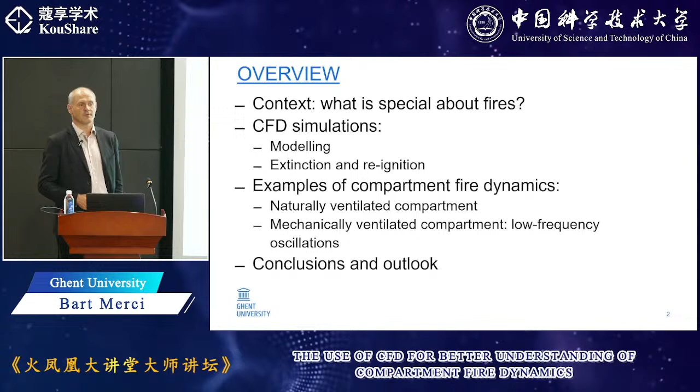I'll then briefly go through equations. I will not spend too much time on that, because that would take hours to fully explain. But I prefer to move on to two examples where we will demonstrate how CFD can probably be useful to understand what's going on in the compartment. The first one will be in a naturally ventilated compartment, and the other one will be a mechanically ventilated compartment. And I'll try to draw some conclusions and give a little bit of an outlook as to where we might be going in the future. But first things first, what is special about fire?

I'm not sure that everybody here is fully familiar with CFD, so I would first like to make clear that CFD is about calculating flows, temperatures, and concentrations inside volumes when we talk about the built environment, but could also be in open atmosphere when we talk about wildfires, as is one of the important research topics here as well. So both compartment fires and wildfires.

Now, as you refine this mesh, you see that the number of cells goes up quite quickly, because you have a three-dimensional space. That means whenever you divide a cell by a factor of 2, it's a multiplication of a factor of 8 in the number of cells, plus also the time steps that you can take have to be shorter, because then you are solving on a smaller mesh. So in general, rule of thumb, if you divide by a factor of 2, your computational time goes up by a factor of about 16, which is quite important, because if a calculation takes 1 hour and you divide by a factor of 2, it becomes 16 hours, and another factor of 2, it becomes 10 days.

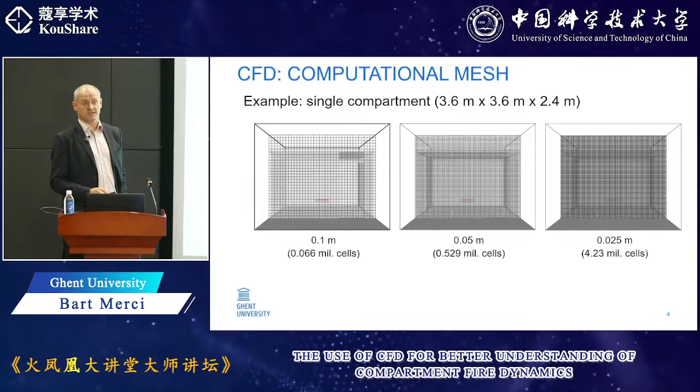Now all these phenomena, if you think back to this representation, happen inside these boxes, and these boxes are a few centimeters large. We're talking here about much, much smaller length scales, very fast processes, so you cannot resolve that. You will have to model it because you cannot see it - it happens inside these boxes and you don't have information about what's happening inside. Now this is the chemistry and the chemical reactions.

Now fires are also turbulent. Why? Because fires are relatively large, and the moment fires grow large they develop turbulence by themselves. That would require an additional lecture to explain, but please trust me on this - fires are turbulent. You can also see that: if you have a campfire, for example, you see the flames dancing around. That is turbulence that you see, and these are turbulent fluctuations in the flames.

Now the ones that you see are, again, on the order of a few centimeters, because we see them with the naked eye, and the frequency is a few times per second, so these would be on the scale of perhaps around a tenth of a second. But these are the large turbulent scales - those are the ones that we see. Turbulence also has a wide range of length scales and time scales itself.

The smallest length scales and smallest time scales in turbulence will not be resolved on the computational mesh. That's why we will be happy to only resolve the large turbulent structures. A turbulent structure in the literature is called an eddy, and so we will have large eddy simulations.

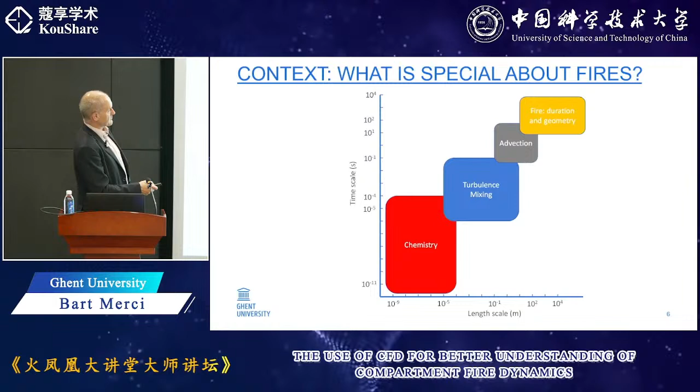And then there is also advection, some people call it convection. That is, for example, the smoke motion. If you have a flame, the smoke will start to move due to buoyancy, due to forces in the flow. Again, relatively large scales, but these are normally quite well resolved. With the computational mesh, we would be in this order of magnitude, so pretty much all of this would be resolved. We don't need special models to deal with that.

So that's the overall setting. The thing is, in fires, and that's another difference from say a combustion device, everything is very strongly coupled to each other.

If you think about a combustion device, take an engine, you would have a team of engineers optimizing a certain design, often to ensure good mixing of fuel and oxygen and very efficient burning. In such circumstances, the flame is the result of the flow field, and the flame is relatively passive. It is where it is because of the designed flow field.

A fire has not been designed to happen, everything happens naturally, and now the flames are actually an important driving force for the flow. That has an important consequence, because I've just explained that we will have to model the turbulent combustion, but the turbulent combustion has a big impact on the flow field. So if you make an error in that modeling, you will make an error in the flow field and you will keep piling up errors. So there is a lot of importance in having a good model for the turbulent combustion.

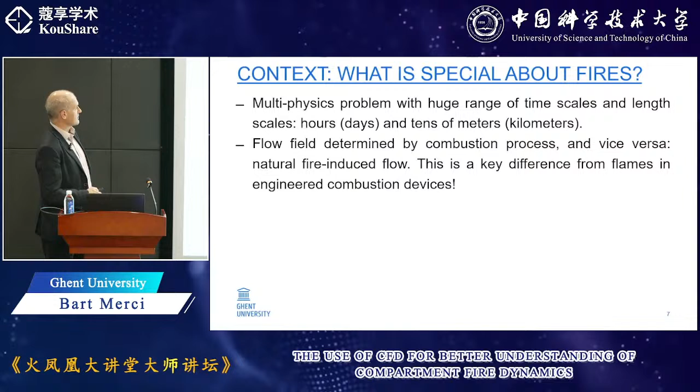So that is different from a combustion device. We will always have an important impact also of the geometry where the fire is taking place. Take the compartment where we are now and the situation as it is. We have a number of doors. That one is now open, right?

If there was a fire over here, the fire would create buoyancy, the flow would start, and essentially the smoke, if we don't do anything, would flow out through that door and fresh air would come in through that door. It will create a certain flow field here inside. But just as well, that door could have been closed and the door in the back could have been open, which would have created a different flow field. If the ceiling had been 2 meters higher, again we would have a different flow field and evolution. So the geometry is always important.

And that comes along with ventilation conditions, because fire needs oxygen. If you have limited ventilation, the fire might die due to lack of oxygen. If you have more openings, the fire might grow in a different way. And then wind will always play an important role. There is a lot of research going on about crosswinds in pool fires out in the open, which is very valuable, but also inside the compartment you will have these kinds of cross flows, which could become very complex, and I'll show an example later on.

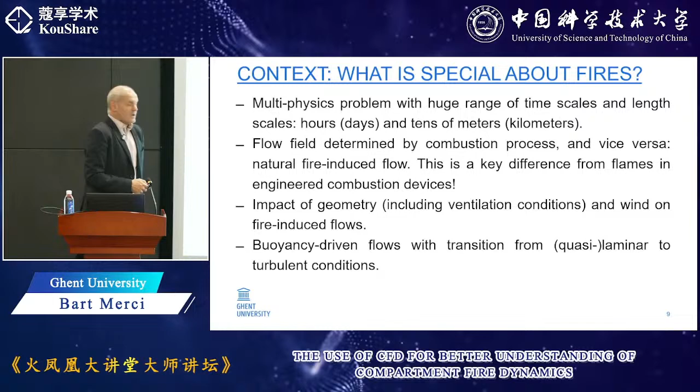Another issue with fires that is quite different from classical turbulent combustion is that fires are large enough to be turbulent, but close to the burning surface, the flow will not yet be fully turbulent. It will be laminar, quasi-laminar, not yet fully developed. That's a problem, because most turbulence models assume you have fully developed turbulence.

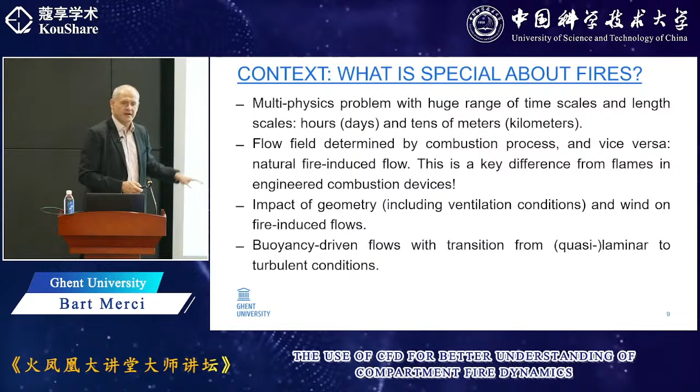You could say, well, if it's okay for the large part of the flame, what's the problem? The problem is that close to the surface, you want a good idea of the heat transfer, because that's where pyrolysis is taking place, or evaporation in case of a liquid fuel. So you need a good description of phenomena happening close to the surface. That is what inspired us in Ghent to work with a dynamic approach, which I will explain in a minute.

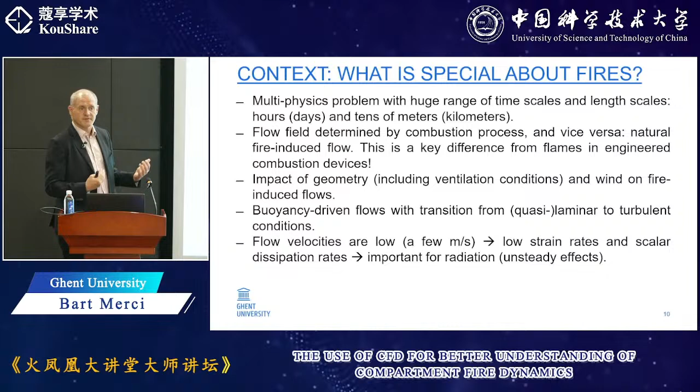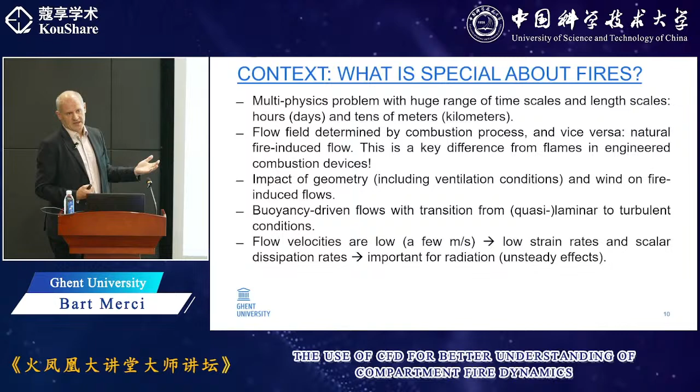Something else quite specific is that the velocities are relatively low. We talk about a few meters per second, in extreme cases perhaps 10 meters per second. I'm not talking about wind, I'm talking about flames and flame-induced flows. If you have low velocities, you also have lower velocity differences, velocity gradients in physical space. Most of the models used in the turbulent combustion community have been developed for so-called jet flames, where you have much higher velocities, gradients, dissipation rates, and strain rates. So again, many of the models cannot just be taken off the shelf and used in fires.

You have buoyancy and an upward rising of the smoke. If the smoke rises, you can think of this as a piston—not exactly the same, but you can think of it that way. If you have an upward moving piston, you create an underpressure, so you have natural entrainment of air. This is a natural process. You have combustion in the flames generating heat. Most of the heat flows away with the smoke, but some is transferred back to the vaporizing or pyrolyzing surface by convection and radiation, and you have a closed loop.

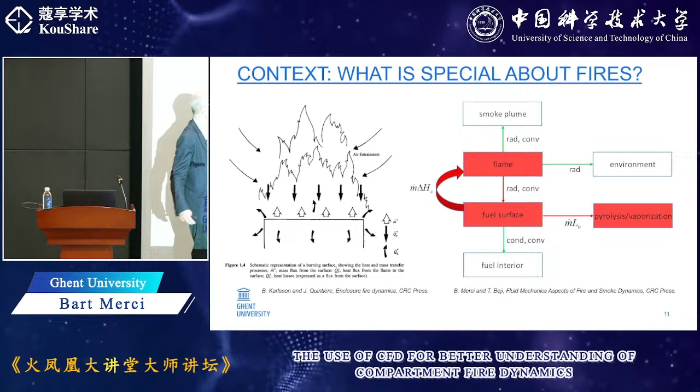The point I want to make is that all of these things are connected to each other. So if you make an error somewhere in this picture, you will affect everything happening. Imagine you are under-predicting the heat transfer to the surface for whatever reason—maybe convection, radiation, the flow field, or the location of the flame. If you under-predict this, you will under-predict the release of combustible gases, you will make the flame weaker, and keep under-predicting the flame—an error that piles up. Or vice versa, if you over-predict the heat transfer, you will release more combustible gases, make the flame stronger, and keep increasing the heat release rate. So this is quite important.

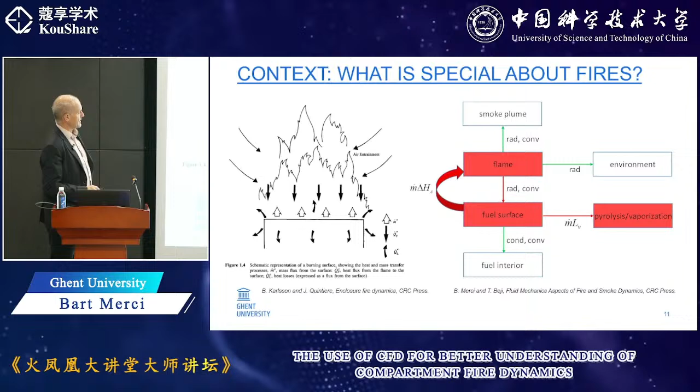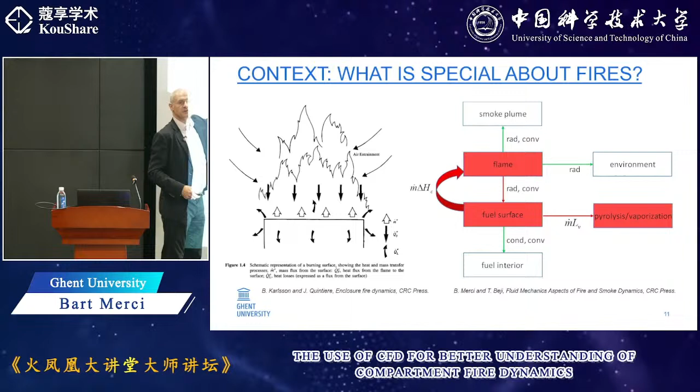A final point I want to make is that in fire flames, the temperatures are relatively low compared to flames in combustion devices. Once again, fires have not been designed to happen, so it's not optimized mixing. There is much soot production and much radiation from those flames, so they lose a lot of heat to the surroundings.

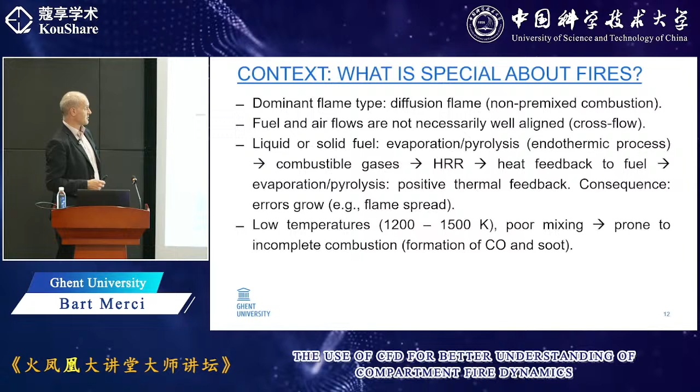The temperatures are relatively low compared to combustion devices, which means many chemistry schemes validated for turbulent combustion in engineered devices are not directly applicable. This is particularly true for the formation of carbon monoxide, which is an important killer in fires, and also for soot. Many soot mechanisms are not directly applicable either. So many problems that we have to address.

It becomes more complex if you have a fire inside a compartment, because most of the heat is going away with the smoke. But if you have a compartment with a ceiling, that smoke does not escape - it's blocked by the ceiling. It will form a smoke layer that also participates in this entire complex heat transfer mechanism, so the scheme becomes even more complex than before.

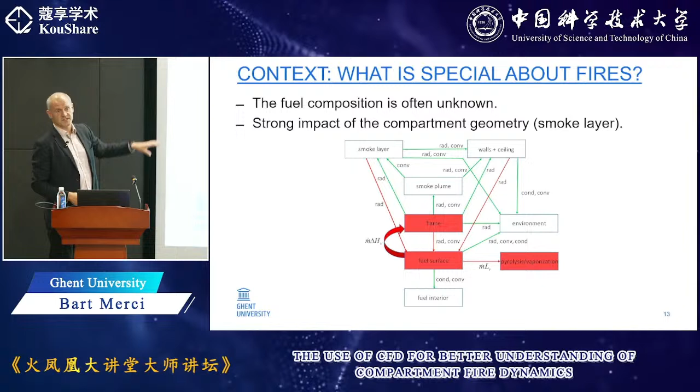I'm not going to go into more detail here. That's about the context, and I know I took some time, but I think it's important to have that first in mind, so that you can now appreciate what we try to do in terms of modeling.

We cannot resolve everything, so we have to introduce modeling, as was already mentioned at the introduction. If you're interested in what people are doing today in terms of CFD, I'd invite you to look at the MaCFP workshop series, a working group under the umbrella of IAFSS, of which Professor Liu is the current chair. There you can see what the different teams are doing - it's a GitHub database with a lot of details.

To summarize, what everybody in the fire community is doing is LES, large eddy simulations, where you resolve the largest turbulent structures. What we do in Ghent is something quite unique at the moment, and we'll see if people follow that - we use a dynamic approach for the turbulent combustion modeling.

What does dynamic mean? It means we do not fix model constants. We make those model constants into parameters and give them values that depend on the local flow conditions. The reason is that the flow is not fully developed, so the turbulence is not fully developed, which means model constants developed under the assumption of fully developed turbulence might not be valid - we want to give them a dynamic value.

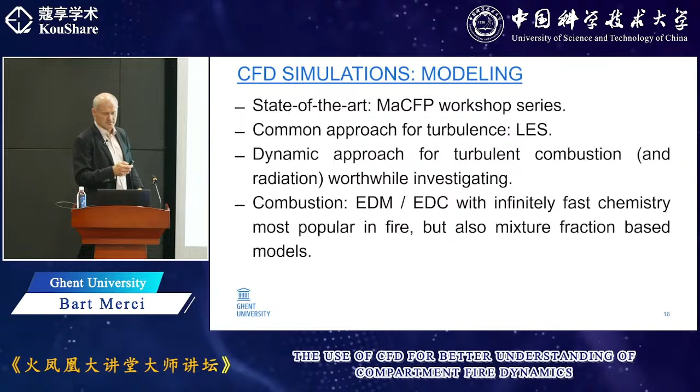This uses infinitely fast chemistry, which is the most popular approach in fires. Infinitely fast chemistry means you assume the chemistry is much, much faster than whatever happens in the flow, which makes sense if you look at the initial diagram - the timescales are indeed shorter. But it also has disadvantages, because assuming infinitely fast chemistry means it will react immediately, even if conditions are perhaps not good enough for reaction in reality. So we also talk a bit about finite rate chemistry.

I'm not going to talk about pyrolysis, I'm not going to talk about evaporation. Those are very important things to consider, but I don't have time to do that. I'm going to go a bit faster here.

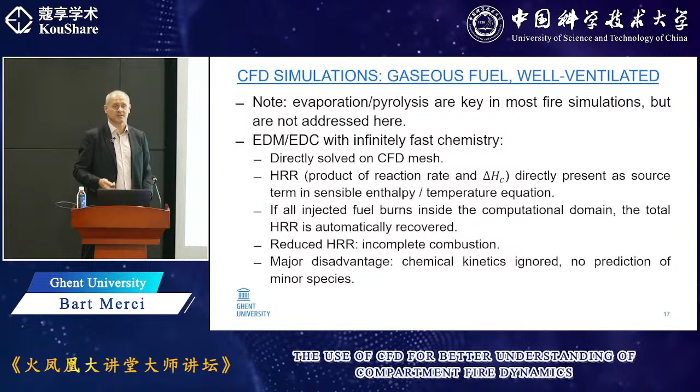The only thing I want to mention about infinitely fast chemistry is that you are ignoring the chemical kinetics, which also means it's difficult to predict minor species - minor species meaning in terms of concentration. For example, carbon monoxide is called a minor species here, but it's actually an important one because it relates to the toxicity of smoke. All right, I'm just going to show the equations.

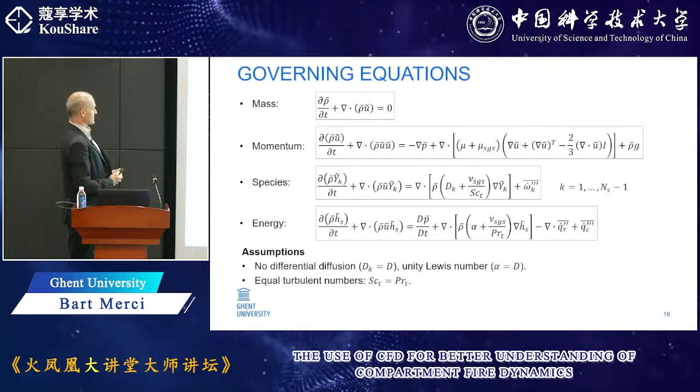I'm not going to explain them all, but basically what you solve is the conservation of mass, the conservation of energy, so the basic laws of thermodynamics. You solve the fluid mechanics equations, which express momentum, also known as the Navier-Stokes equations, and you solve transport equations for different chemical species, a convection diffusion equation with a source term.

And you make a number of assumptions. For example, in these simulations, we do not worry about differential diffusion. If you had hydrogen as a fuel, you would have to look into that, because hydrogen diffuses much faster than other gases, but that's not the point here. So we use this dynamic approach.

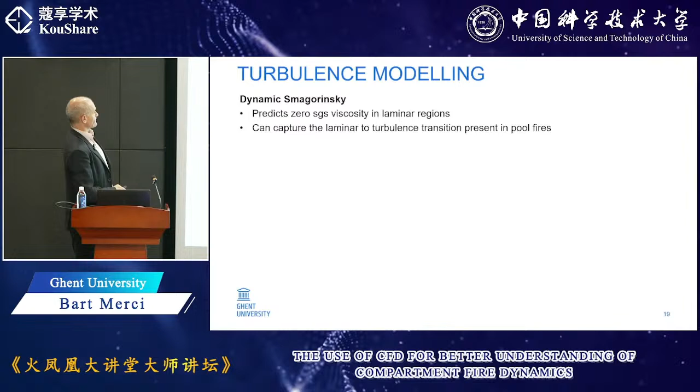Once again, I'm not going to guide you through all the equations, that would take too long. But what I'd like to stress is that if you have a large eddy simulation approach, you also have to model the things you don't see on the mesh. Those things happen inside the cells, and that's called subgrid scale in the literature. So SGS means subgrid scale, everything that happens inside the cell.

And basically what you want to know is how much kinetic energy is in those cells, and that's the subgrid scale kinetic energy. So that's the kinetic energy of the turbulence inside the cells, and also how quickly the turbulence disappears. There's the so-called dissipation rate.

Now for that you have expressions, I'm not going to explain that, and you have model constants: Cs, CI, C epsilon. If you look here in this table, these are numbers you find in the literature, and it's quite a wide range. That's not a coincidence, because if the turbulence is not fully developed, you'll have different situations and different numbers. So rather than picking one set here, we now do that dynamically.

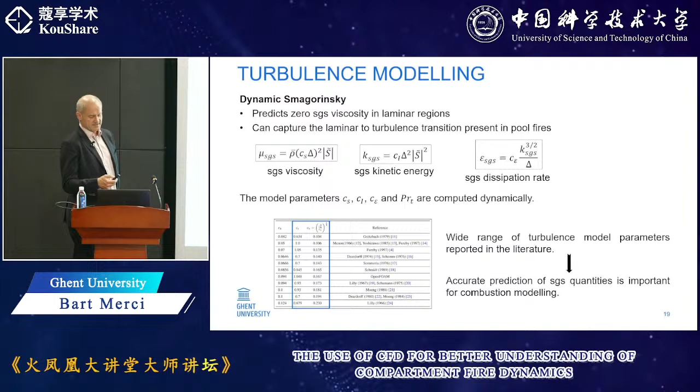Now what does that mean? Well, I'll come back to that later. But what that implies is that you also have a direct impact on the turbulent combustion, because a very important factor here in the turbulent combustion model is the mixing timescale. And the mixing timescale is something that results from turbulence.

So the turbulent timescale, the time linked to turbulence, is used to characterize the turbulent combustion timescale. What that means is you assume that the combustion reactions themselves are much faster than the turbulent mixing. Remember, in non-premixed combustion, they have to mix before they can burn. The assumption here is as soon as they are mixed, they burn.

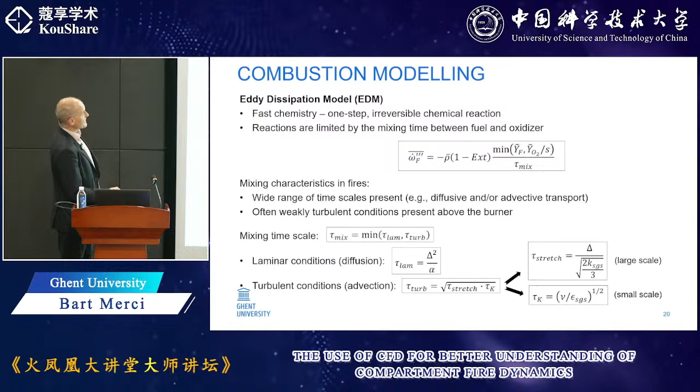So then you have to make a decision on what that would be. You compare a laminar timescale with a turbulent timescale. Many choices to make here, but long story short, it's the turbulence that determines the timescale for the chemistry.

So that brings me to this plot, which again I'm not going to explain in all detail. If you're interested in details, I'll be happy to discuss at length. But what you see here are expressions for turbulent timescales normalized with the so-called integral turbulent timescale at subgrid scale. There are a number of timescales, but the important one here is the red line, which stems from the turbulence model.

Now you see three plots here, and the left one is for the value C epsilon equal to 1, which means a fully developed turbulent flow. If you have a weakly turbulent flow, C epsilon is equal to 0.1, which could happen close to the surface. You see that this red line has been shifted quite far down in this plot. And then you can have intermediate situations as well.

So what you see is, depending on the choice you make on C epsilon, you will have relatively different turbulent mixing timescales, so you will directly impact the turbulent combustion. Which one to take? Again, impossible to say in advance, which is why we do the dynamic approach, so that the software automatically tells you which value is reasonable depending on the local flow conditions.

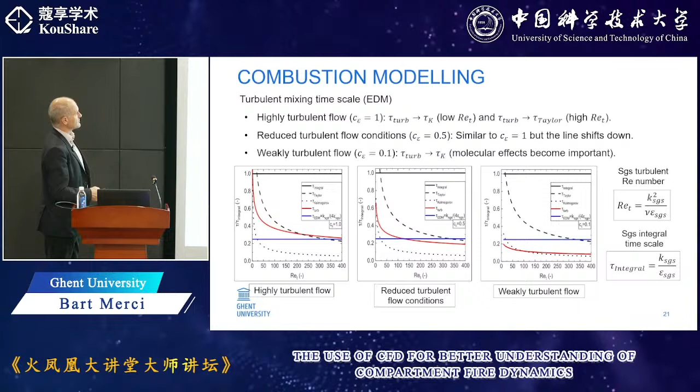You do that with dynamic filtering. Again, I don't have time to explain that in all detail, just want to give you a feeling that this is what we do dynamically. Now, this was with infinitely fast chemistry.

If you want to also look at extinction phenomena and ignition phenomena, then you can no longer assume infinitely fast chemistry. You will have to introduce a new model.

One model could be based on a critical flame temperature, where you say that as long as the temperature remains below a certain value, you have no reaction.

It could be based on the Damköhler number, which is a ratio of the flow timescale to the chemical timescale. But you could also think of doing finite rate chemistry and let the chemistry predict whether or not you will have extinction.

If you want to do that, we work with the so-called eddy dissipation concept, where you introduce some finite rate chemical kinetics. Again, many choices to make, many versions on the market.

If you take the limit here for infinitely fast chemistry, it becomes similar to the eddy dissipation model with a different time scale. Again, that would lead too far.

More recently, we are not necessarily very happy with the eddy dissipation concept approach, because EDC also assumes fully developed turbulence. So Professor Snegirev, who has been in the team for more than a year, has developed a new subgrid scale combustion model.

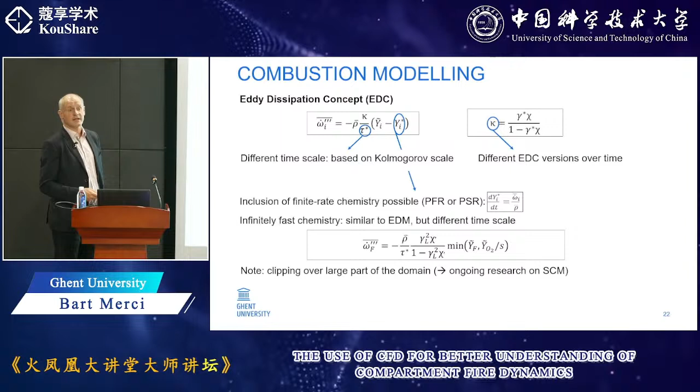If some of you will be in Milan at the Combustion Symposium, I invite you to his talk, because there he will explain how we do this now in his work. And then you combine it with some finite rate mechanism—there are, again, many in the literature, not too important here.

Radiation—I'll go even faster. Radiation is very important, but I will not spend time here today to talk about that.

The simplest approach is to work with a so-called radiative fraction, where you have a certain heat release rate of the fire and you assume that a certain fraction is lost into radiation. But also here you can go much more complex, because that radiative fraction might not be known beforehand.

So once again, you can solve an equation with emission and absorption. You can make those length scale dependent, and there are expressions for that in the literature, as you see over here. And then the path length is an important quantity.

It appears here, it appears there, and you can prescribe that, or you can make it again dependent on the flame shape. The V here stands for the volume of the flame, and A is the area of the flame, and then you can do that again in a dynamic way.

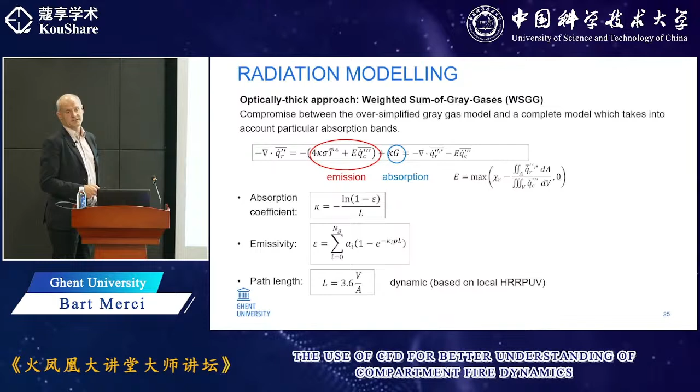But allow me to go a bit faster so that I can go into the examples. And so also here, I'll go more quickly.

Just as a reminder, if you look at extinction and reignition, you can have three ways of extinguishing a flame in fires. One is the aerodynamic approach, which is what you do if you have a candle. If you blow out a candle, basically what you do is create high strain rates in the flow, with a lot of heat losses. It's called aerodynamic quenching—a high value of conditional scalar dissipation rate.

You can have thermal quenching, which means the flames get too weak because they lose too much heat, and then the chemistry no longer continues. Or you can also have dilution, where gases are being mixed, combustion products come in, too little oxygen, then you might also have quenching by dilution.

So you can deal with that through a critical flame temperature or through a Damköhler-based approach. Quite a number of options in the literature again.

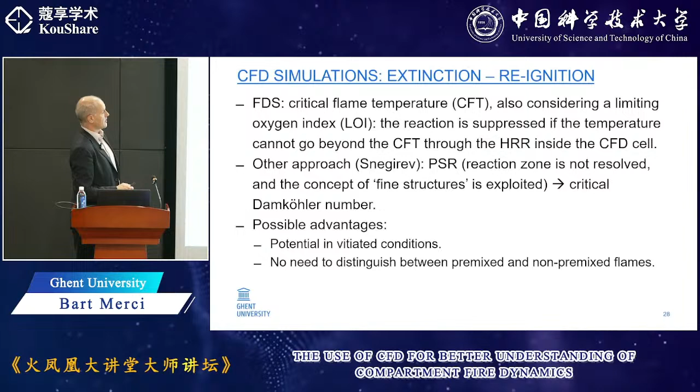Also here, Professor Snegirev worked on that a long time ago, with the perfectly stirred reactor approach. More recently, Dr. Dorofeev from FM Global developed a framework based on mixed eddies.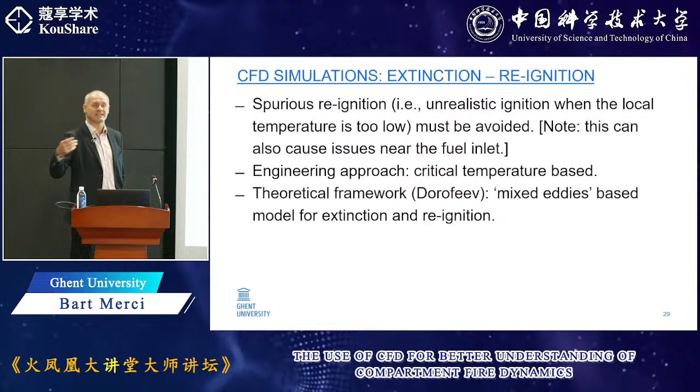One thing in common for many of the approaches is that it's not so easy to avoid what is called spurious reignition. Spurious reignition means you have reignition of the flame somewhere where you would not expect it, and there is quite a bit of work to do on that.

What we are trying to investigate at the moment is to see to what extent finite rate kinetics can help with that, and to what extent this novel subgrid combustion model might help with that.

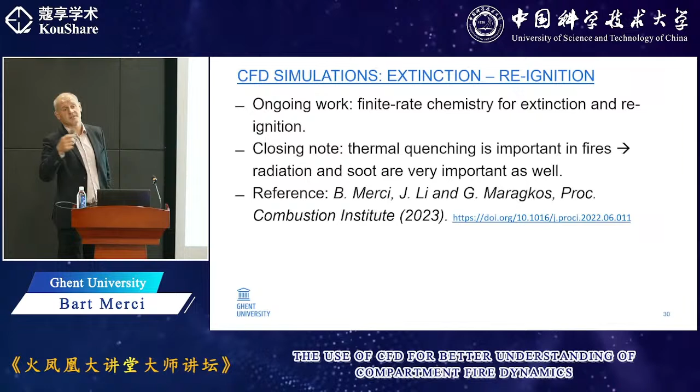If you want to read a bit more detail, there was a presentation at the Combustion Symposium in Vancouver. You find the link over here, where I give a little bit of an overview in the literature of the different approaches on this. But let's go into two examples.

And so let's first go into a naturally ventilated compartment. These are tests that have been done in the US at the Underwriters Laboratories.

You find the details here on the slide. Essentially, it's a compartment, the same one you've already seen at 3.6 by 3.6 by 2.4, with 2.4 being the height. It has one door. In this picture the door is closed, but in some tests the door was opened. The door is not in the center of the wall, so you get a more complex flow.

Measurements include thermocouple trees inside for temperature, and radiometers and heat flux gauges for radiation and heat fluxes. Some pressures were measured, and a bidirectional probe in the door opening was used to attempt to measure velocities. It's very difficult to measure fire flow velocities accurately because the velocities are low, so you need a lot of resolution. You also don't know the direction of the flow very well, since the fire determines the direction to some extent. So this is always a bit questionable — if you see velocity data in the literature, you need to be quite critical about it.

The fire is located in the center of the compartment, but they also moved it to the back wall, to the side wall, and to the corner, with three values of heat release rate. So they had a range of conditions, which makes it interesting for modelers, because a range of conditions lets you get an overview.

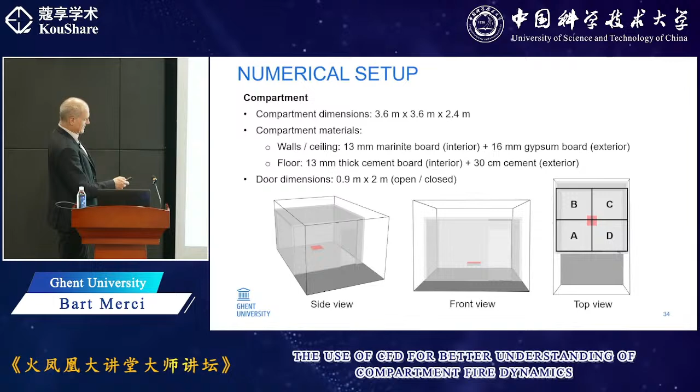Some more details — perhaps most important is the specification of the thermal boundary conditions. Boundary conditions are always key in CFD because they determine the final solution. The size of the door is mentioned here, and it could be opened or closed.

You've already seen this picture before — we tried different meshes, following the so-called D-star criterion. This tells you that if the most important characteristic length scale is the size of the fire, you need a resolution of about 15 to 20 for well-resolved simulations; 10 is maybe acceptable. The finest mesh is certainly always fine, the medium mesh is perhaps a little problematic for the smallest heat release rate, and the coarsest mesh is not good enough — that's the expectation in terms of resolution.

Also important to mention: since this is a large eddy simulation, every instant gives a different situation, but it's not very useful to look at instantaneous results — it's better to look at averaged results. We first calculated 5 minutes to reach steady state conditions, then another 5 minutes to get averaged results over the steady state period.

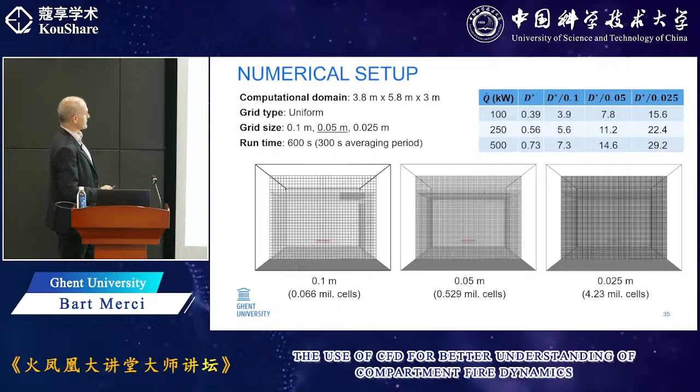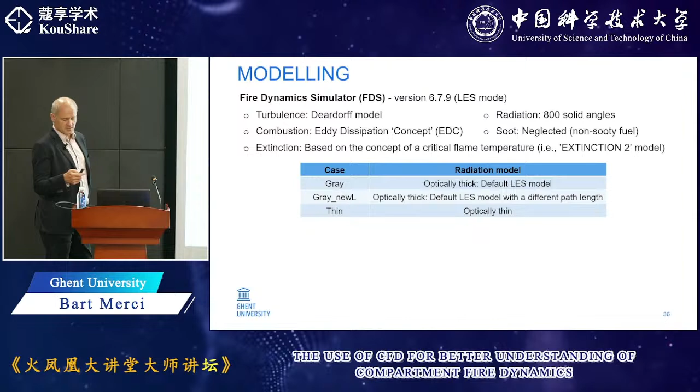Some more details on how we modeled turbulence. This is done with FDS, the previous version, with 6.8 being current at the moment. We work with FDS, but also with FireFOAM at Ghent University, the code developed by FM Global. FDS is a code developed by NIST, the most used code in fire safety science and fire safety engineering. There's some discussion on the radiation modeling that I'll skip now, but details are available if you want them.

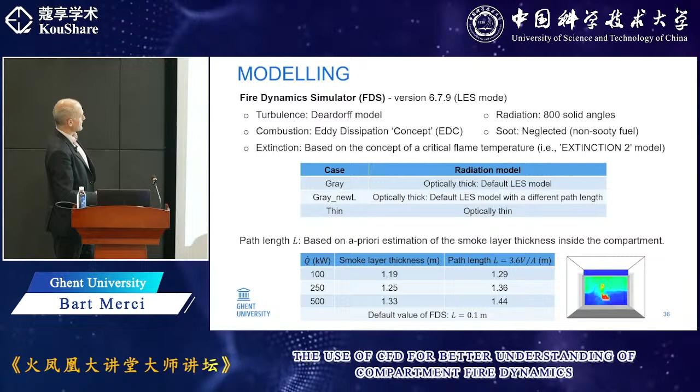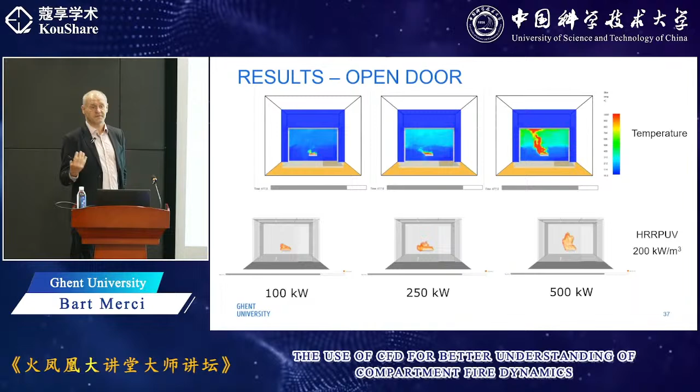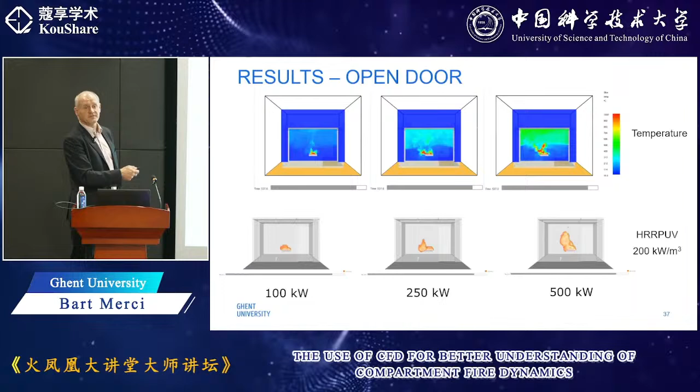This is one example where you can see how CFD can help you understand measurements in the experiment. Because in a situation like this, you would expect a thermocouple tree over here to record higher temperatures than a thermocouple tree over there, even though they are symmetrically positioned inside the compartment. That would be very difficult to measure because the flow field itself is very difficult to measure. There are more techniques coming into the literature, like PIV techniques, to visualize the flow, but CFD is definitely a very helpful tool to understand that.

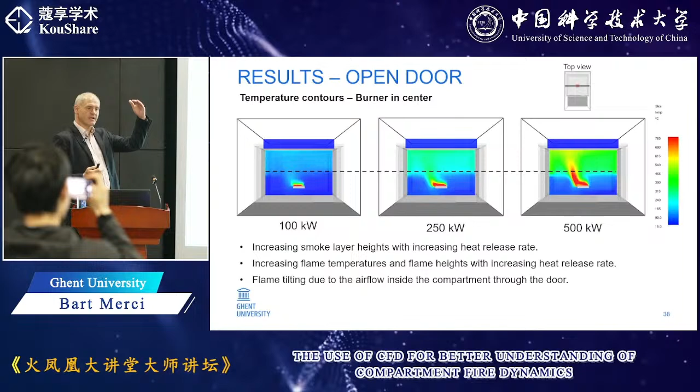So that's just a qualitative image, which I think is always important to begin with. Then you can start to do a quantitative analysis. You can look at the smoke layer height, the neutral plane height, and quantitative information on temperatures and so on and so forth.

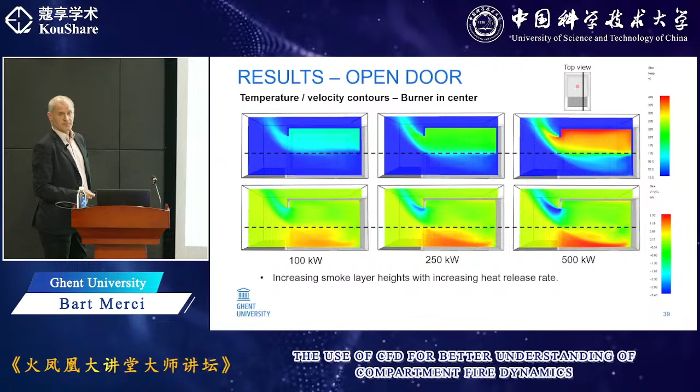I'm not going to discuss that in all detail, but it also allows you to make plots like this, where as a function of the heat release rate, the top row is the temperatures and the bottom row is the velocities. I've included this slide to demonstrate that the fire is the driving force here. You see that if I have a stronger fire, I also have a stronger flow through the door. Here, red is high velocity inward, blue is high velocity outward, so you see that the flow field becomes stronger as the heat release rate becomes higher.

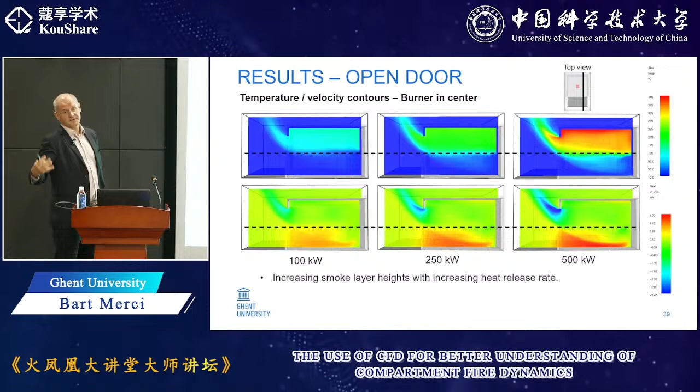Also, the flame tilting was more clearly present for the higher heat release rate than for the lower heat release rate. So once again, CFD helps you understand the phenomena inside the compartment, because if the flame is tilted, it has an impact on the heat transfer. In this case we had just one fire source, but imagine you have combustible objects inside—the objects closer to the flame will ignite more rapidly, and that will have an impact on the evolution of the fire inside.

So this is the behavior as you would like to see it. This is state-of-the-art CFD—we can predict the extinction, we can predict the impact of ventilation, we can predict the impact of the flow field on what happens inside.

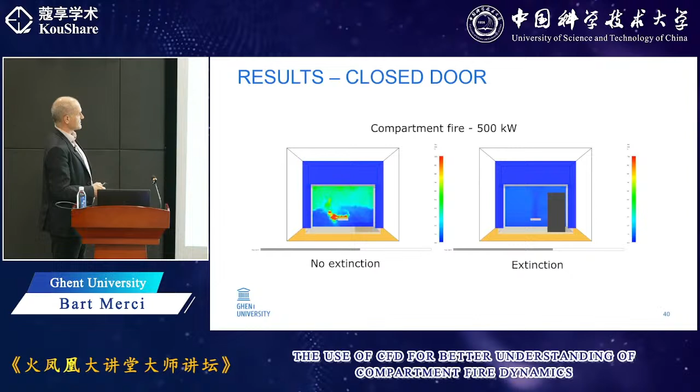Second example: a mechanically ventilated compartment, in the configuration of an airtight compartment. This is work done by Junyi Li when he was a PhD student in Ghent, and he visited IRSN in France. IRSN is the French Institute for Nuclear Safety, and this is the context here.

In nuclear power plants, you have radioactivity, so what you do not want, if there is an incident, is for radioactive material to go into the atmosphere. So basically what you do is create an underpressure in the compartments where there is radioactive material so that it stays inside. This is done by making compartments airtight and using mechanical ventilation, extracting a little bit more than what you supply, so you create an underpressure.

Now the problem is, when you have a fire, the fire will create hot gases. Hot gases want to expand, but if it's airtight, the gases cannot expand, so what will happen is you will have an increase in pressure.

If you have an increase in pressure, it's easier to extract gases but more difficult to supply them. The supply is air, the extraction is smoke. Imagine now you have less supply of oxygen—what happens? The fire becomes weaker again. If the fire gets weaker, the pressure will decrease and you'll have feeding of fresh oxygen, so the fire gets stronger again. You have reduction of oxygen, then increase of oxygen. So you can have oscillatory behavior.

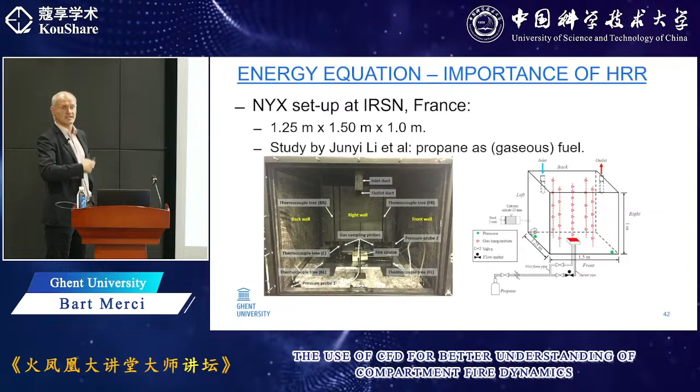Long story as introduction, but this is what the experiments looked like. You have basically a box, almost cubic, about 1 meter in size. Close to the ceiling there's an inlet duct and an outlet duct—the outlet duct is difficult to see. You have thermocouple trees again, some gas sampling probes to measure gas compositions, and pressure was important to measure, because we wanted to understand the pressure dynamics since that has an impact on the ventilation dynamics.

We worked with gas as fuel. It was not straightforward in terms of safety, but it has the big advantage compared to liquid and solid fuels that we have complete freedom of heat release rate evolution. By turning on the valve of the gas, you can easily change the heat release rate. So Junyi did a wide range of conditions, changing how quickly the fire rises, how high the heat release rate becomes, how long it takes, how quickly it decreases.

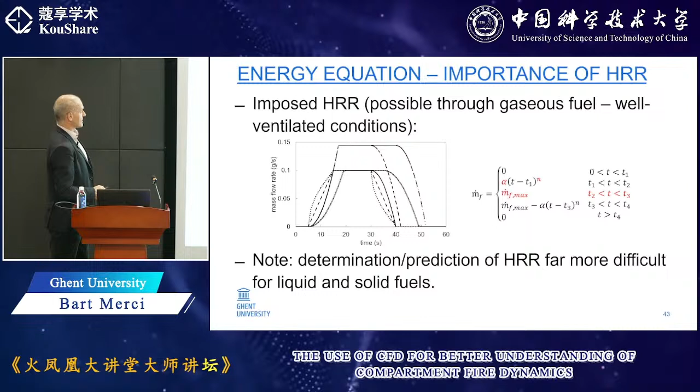So we have a number of parameters that we varied, once again because we wanted to have a range of conditions, not one specific condition. And the question is now, what does that imply in terms of pressure evolution?

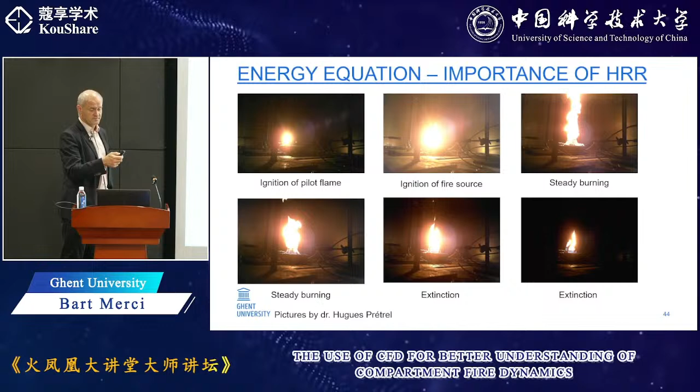Here you see a couple of images provided by Hugues Prétrel from IRSN, showing ignition of the pilot flame to get things started. This is then the real fire source, steady burning. I took two pictures here just to demonstrate that you have turbulence again—the flames, even at the same stage of the fire, can look quite different. Then when you close off the valve, the fire extinguishes.

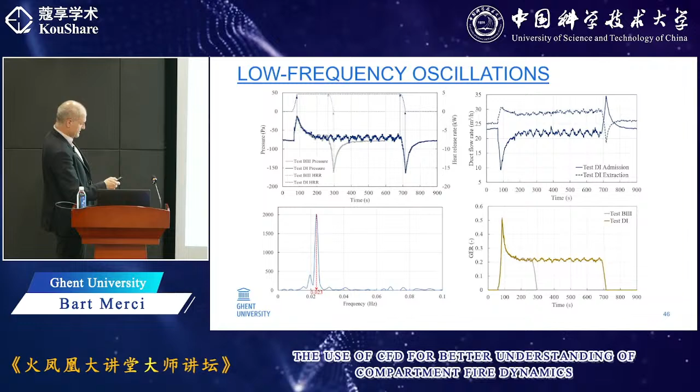So these are all CFD results, but it goes with this evolution. So the first stages, you will not have a flame yet - it's not yet ignited. So you will see the flow field as a result from the ventilation system.

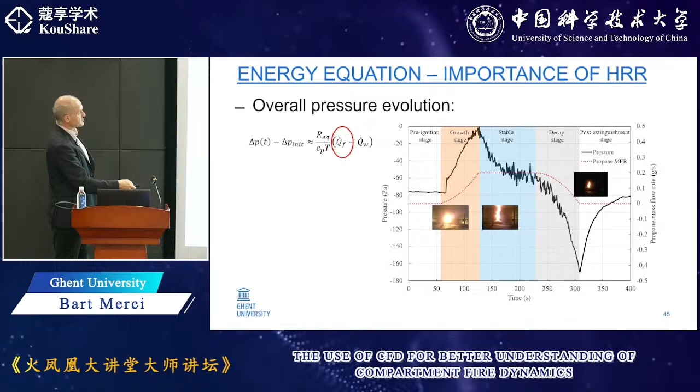Then we will ignite the burner, and what will happen is we have the pressure increase. So what that implies is that it's going to be more difficult to supply fresh air. I'll talk you through it when you see the video. Then we're going to keep the fire steady, and you will see that it's going to be easier again for the supply of fresh air. Then we're going to reduce the heat release rate, and then you'll see what happens.

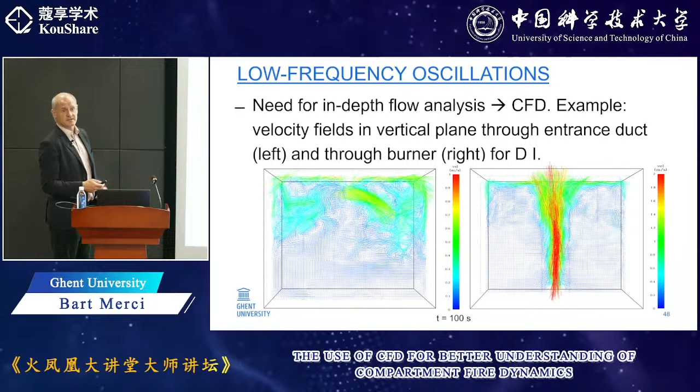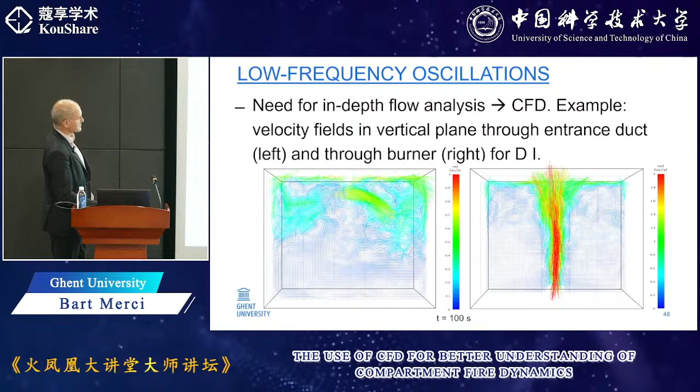The next few slides are just a few visualizations to demonstrate or highlight what I've discussed. So this is the situation where we just have the ignition of the flames: quite vertical flow field here and reduced supply of air.

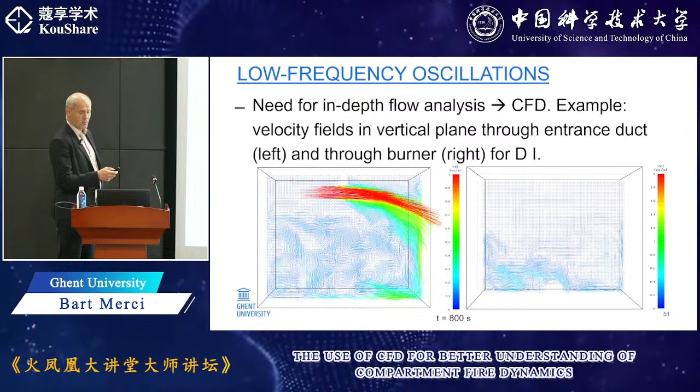Just wanted to add again, you see many turbulent structures, so this is a quite complex flow field. This brings me to the closing of this lecture. I've tried to explain the specific context of doing CFD in fire simulations, and that there is a very strong interaction between the combustion processes, the turbulence, the heat transfer, and the flow fields in general.

We believe detailed insight into the flow field is important to understand compartment fire dynamics, and at the same time it's not easy to measure. That's why we believe there is potential in the use of CFD in fire safety science research, and certainly also in fire safety engineering for the same reasons.

We believe there is a lot of potential in the future as well, in particular when buoyancy is not the only driving force. Here we always had relatively small compartments where the fire was a dominant factor, but you could also have larger open plan spaces where the fire might be moving around. That will create, again, complex flow fields. You can have configurations where the wind is important, large open plan fires, and you can think of many more.

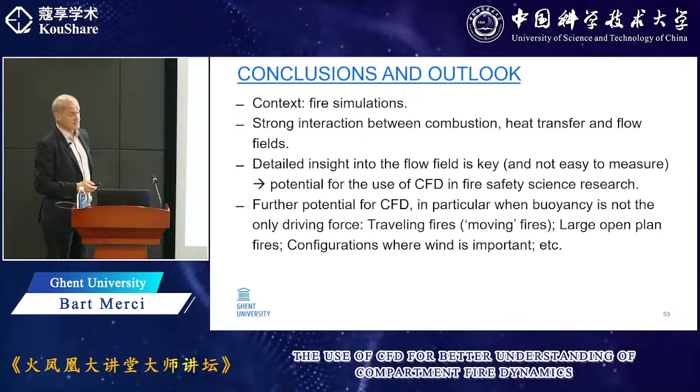Extinction modeling and reignition modeling are not straightforward. This is something that will require years of research to come up with a reliable answer. I did not discuss mixture fraction-based models today for combustion, but they might be worth looking into. There are issues there as well, because low scalar dissipation rate makes the integration not straightforward and can lead to issues of not recovering the heat release rate as you thought you would get from the inlet boundary conditions.

Thermal quenching is important in the fire, so radiation and soot will be research topics for the coming decades, and we still believe the dynamic approach for this could be an appealing one to follow.

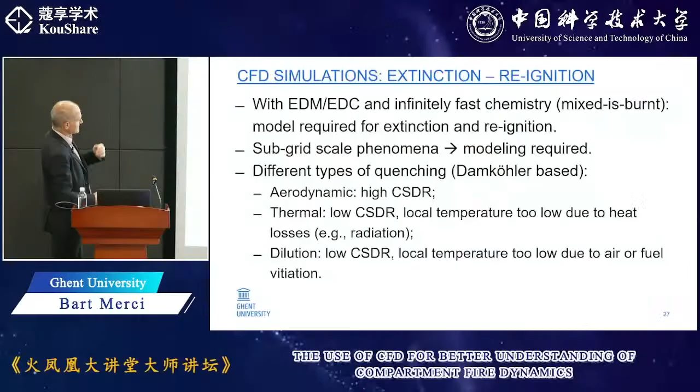Recent experimental data done by Anthony Hamins at NIST also shows carbon monoxide profiles as a function of height - we're off by a factor of 2. The reason we think is that the Westbrook and Dryer mechanism was simply never developed for the low temperatures that we have in fire flames. This is a demonstration, and this is work by Jerry Attabari from the team, who will present results as a poster at the Combustion Symposium comparing these different mechanisms. You see they have not been developed for fire configurations and fire simulations.

So what we are working on now, again with Professor Snigirev, is to start from auto-ignition data at low temperature and high temperature and try to come up with updated kinetics using that auto-ignition data - trying to redevelop some of the kinetics that might fit better in fire simulations. This is ongoing work, but that is also a big difference between the turbulent combustion community and fire simulations. Okay, next question please.

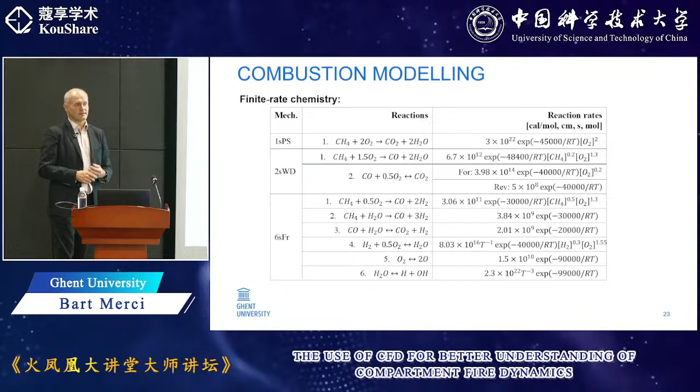Thank you for the interesting presentation. Just one quick question - some of our colleagues in USTC investigate the blue ghosting flame through experiment, which usually appears in the extinction state of the compartment fire. Could you comment on whether FDS is capable of modeling this kind of phenomenon? That's a very good question.

Indeed, the blue ghosting flames are a very specific regime of combustion, and I think it's fair to say this is not the target regime that FDS developers have had in mind when introducing their models. Let me explain that reply - FDS has been developed not necessarily with fire safety science in mind, but with fire safety engineering in mind. So the choices introduced as default models in FDS have not been developed per se for scientific research. But the source code is open, it's openly available, so anyone is free to develop and implement their own submodels into the source code.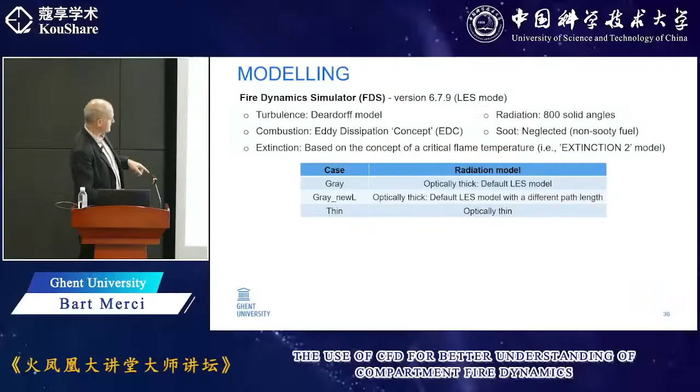To give one simple example, if you take the setup I've shown - it's even better to see in the other configuration - this is what it looked like in the experiments. We did not include the thermocouple trees in the simulations; they were not there. We put points at the same position as the thermocouple trees to get simulation results there.

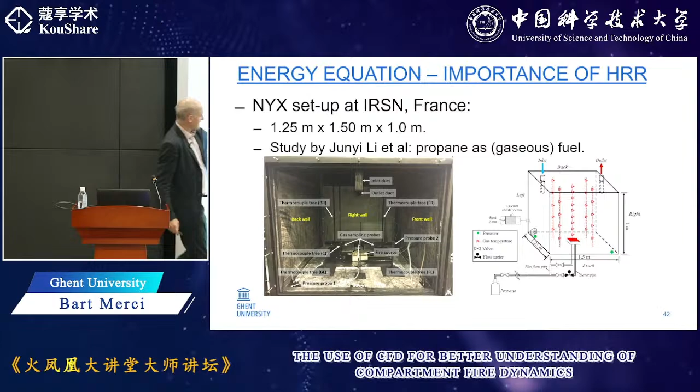So intrinsically, we assume the thermocouples do not have an impact on what happens inside. Actually you make the same assumption in the experiments, because even though perhaps you do not mention it explicitly, you implicitly assume that will not change what happens inside, otherwise you're changing the conditions inside. I'm mentioning this because particularly when you have a gas sampling probe close to the burning surface, it has been shown this can have an impact.

If you have a probe there, you're changing locally the flow condition and changing the mixing of oxygen with the gas. Particularly when it's difficult to have repeatability, it's also going to be very difficult to find that in the numerical simulations, because there you would also have to introduce those details that have an impact on the experiments into the CFD.

How to do that? Very difficult, maybe even impossible - if even the experimentalists who know all the details of their setup cannot put their finger on what creates the ghosting flame or not, you also cannot introduce it in the CFD simulation. So thank you very much for that comment, because that is, I think, also a field where we still have to learn a lot.

Especially for the small size of the compartment, I think the thermocouple trees will have a very significant influence. Yes, could be, yeah. Next question.

Thank you for your enlightening presentation. I'm a PhD at USTC, now doing research in flame and combustion of solids, and I have some questions. First, how can we simulate behaviors such as ignition, piloted ignition, auto ignition, and flame spread of solids? There are so many kinds of solids, and their properties are totally different. How can we simulate parameters like critical temperature and flame spread?